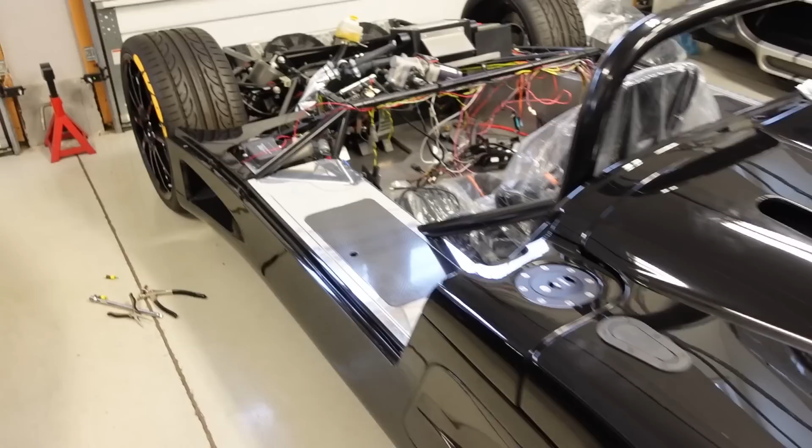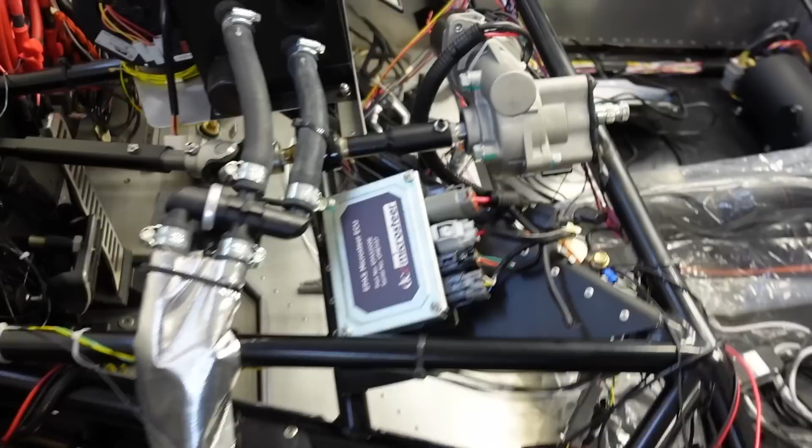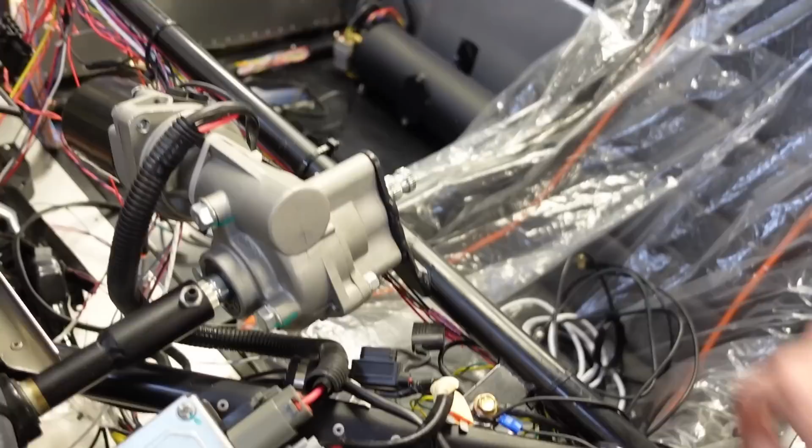First of all, I took off the adapter and everything, so all that's left is a little stub here, which is nice because I could put the front cowl, the dash, on without interfering with this. There was enough space between the end of this shaft and the dash where, through the access panel in the fender well, I could reach in and put a piece of tape with a 1-inch circle on the dash that lined up perfectly there. So pretty easy, straightforward there. Let me show you what that looks like.

Here's the piece of tape with my circle, and again that lines up longitudinally centered with that stub shaft. I'm going to have to make this hole a little bit bigger, maybe 1.25 inches in diameter, but this will at least get me started, and I know it's in the exact right orientation on the dash. So let's get that thing drilled.

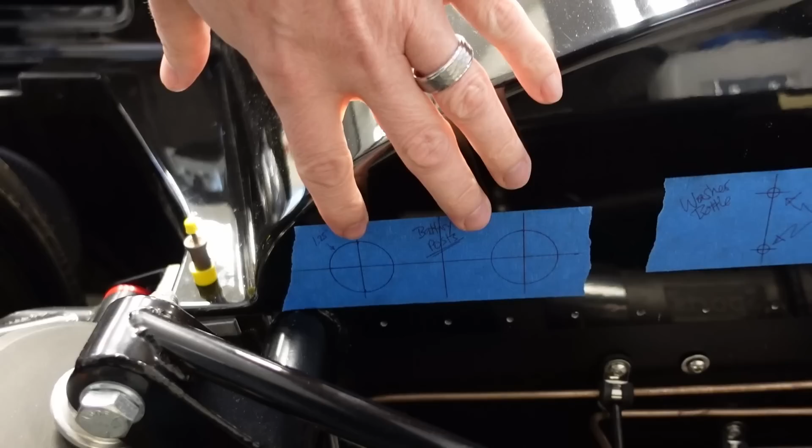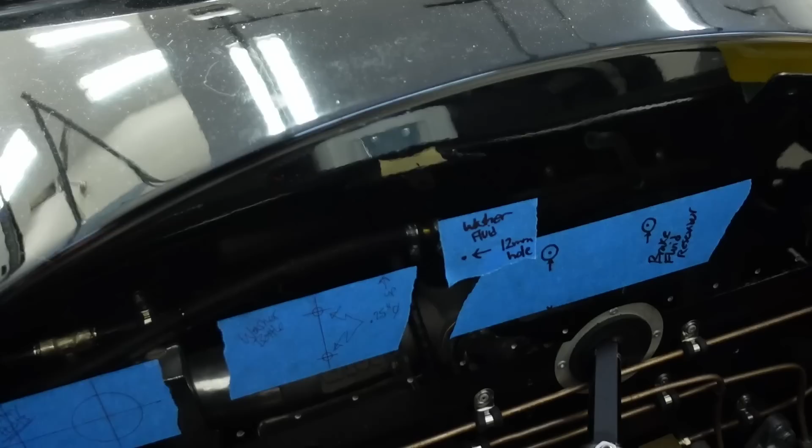I've also got a bunch of holes here all marked out on the front: my battery stud posts, the reservoir for the windshield washer fluid I've got here, as well as the brake fluid reservoir that's going to get mounted up here, and the pass-through hole for the windshield washer fluid pipe. And then I've got the wiper motor holes here all marked out, in addition to the sprayer nozzle there as well. So I think I've got this marked out.

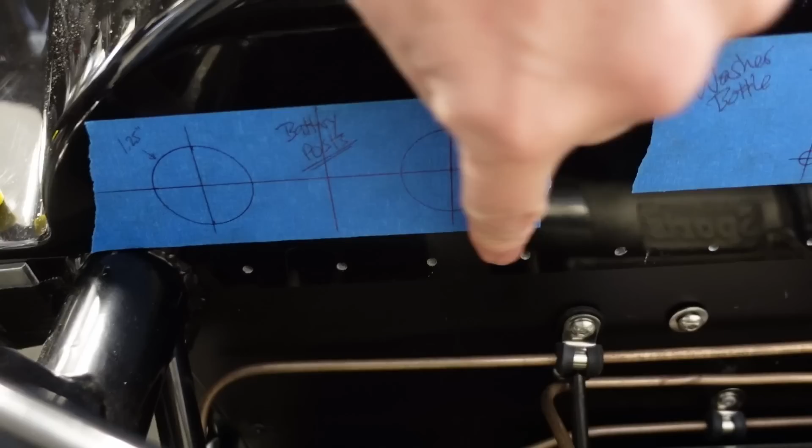I've already drilled the rivet holes you can see here along the base, and I cut out a little half-round moon shape here to go over my grommet. There's one rivet head preventing this from sitting completely flush, so I've got to trim a tiny notch so it sits flush.

So those are done. Of course, I'll have to mark all the holes here and along the top to rivet this down to the body as a final step once that's complete.

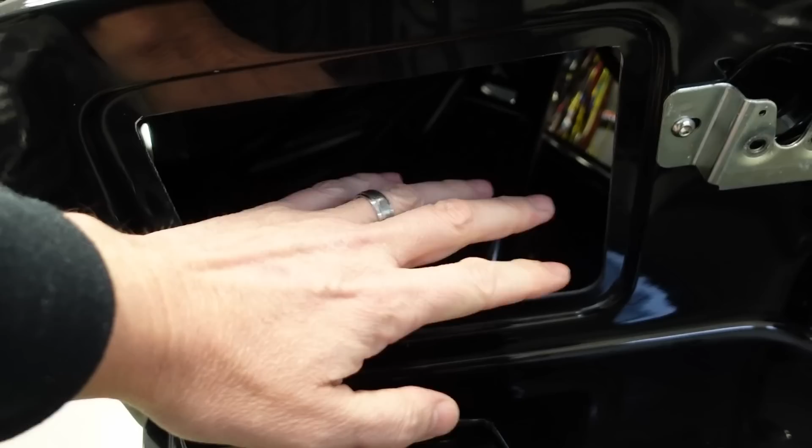I've got the covers here. Normally on these cars this is where the fuse panels go, but given I have the Motec PDM 30, there are no fuse panels, so this just becomes an access panel to get under here in the cowl area.

There's one on each side, and these come with just flat aluminum covers. You rivet some holes, put in some riv nuts to hold them. But what I'm going to do is use some carbon to create some carbon panels.

So I have this sheet of carbon here, about 3 mil thick. Here are the original aluminum cover plates - I'll use them as a template and simply cut out the carbon to make some carbon panels. That'll be a nice trick little update and upgrade for this front cowl.

The other thing I need to start thinking about is the interior - what I'm going to do about it. As we've seen many episodes ago, I carpeted this rear bulkhead, again just to help with sound dampening, but once the seats are in here you're really not going to see much of it at all.

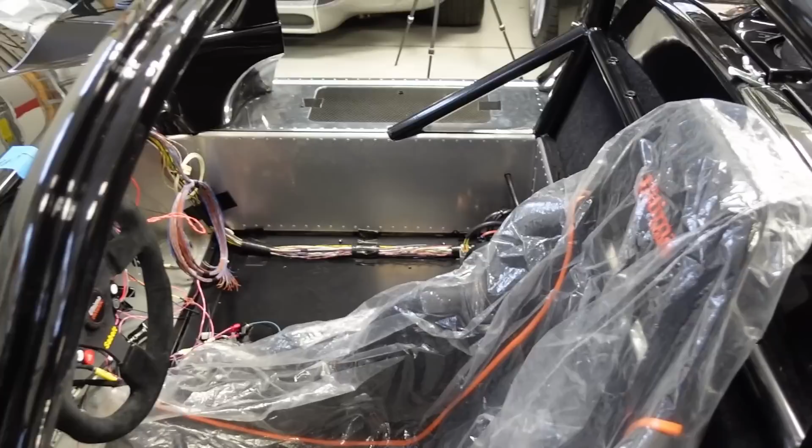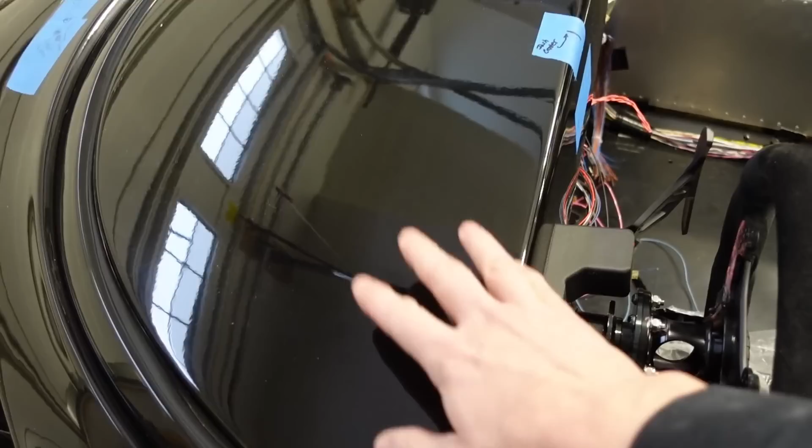But rather than carpet the rest of the interior, certainly on the sides, I'm thinking of using some foam-backed black Alcantara on the panels down the sides. I do have the Alcantara dash covering here with orange thread and orange piping that will look nice, so this entire area - the front of the dash, the top of the dash - will all be Alcantara.

Of course I've got the Alcantara steering wheel too. That's what I'm thinking - let me show you some samples I have. So here are some samples I picked up from a company called Relicate. You can buy a lot of different OEM Alcantaras here, but I've got all different black colors.

A basic one there, then there's a perforated one - it's got little breather holes in it. Then there's this foam-backed version, about 3 mil thick in total, but really soft and plush. And then this is an exterior Alcantara.

This is for outdoor use. This is a convertible - of course I never plan on driving this thing in the rain or getting stuck, but I suppose this exterior stuff might be a nice insurance policy. If it ever does get wet, it will withstand the water.

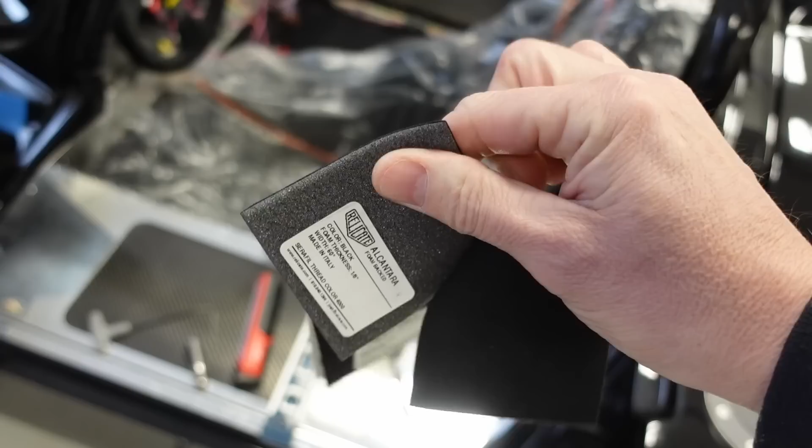I'm currently leaning towards this foam-backed Alcantara given the soft plushness of it, thinking I could cover the entire side pod area with it. And the beautiful thing is, this is thin enough that I could shave just the edges of this aluminum down to give me a bit more tolerance between the cover and the aluminum, then simply fold this over to give a nice edge, a nice seam all the way around, and leave this cover exposed carbon.

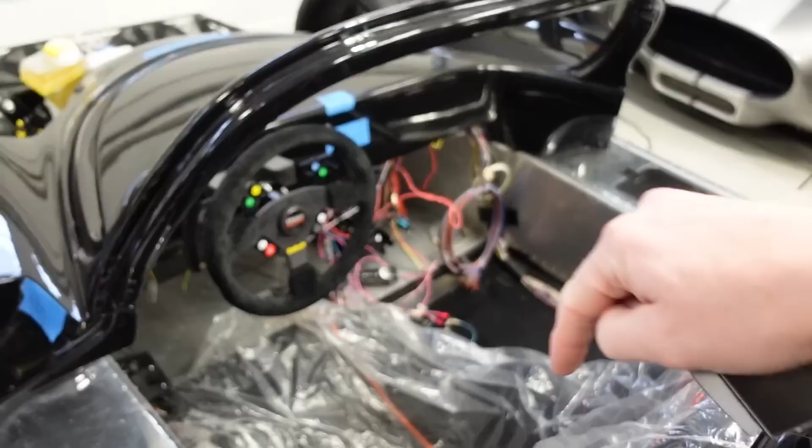I do have a front carpet area - for the main footwell I ordered from the factory a black with orange piping front carpet. The other thought is maybe at some point having an interior guy cover these roll bar tubes in the same Alcantara as well. That would make it look trick.

That's where I'm at. I've certainly got a lot of wiring to clean up still - not a big deal, but getting this front cowl fit, pre-fit, holes drilled, ready to go. That's what I'm currently working on as well.

One other thing I did - if you remember, many episodes ago I installed these quick latch systems here, and started doing it on the front. The post - you can see the hole here - this is where the post goes for the quick latch. On the front cowl I'll cut the quick latch in here and it will mount there. This is the original latch system that goes on the front cowl.

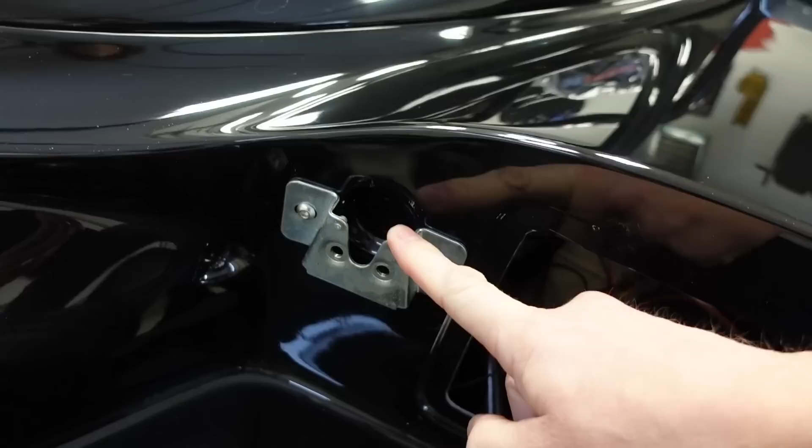The other side's over there. I actually completely disassembled the latching mechanism so that this simply becomes a place to hold the post for the front clam. The latching mechanism will be the quick connect system that I put here.

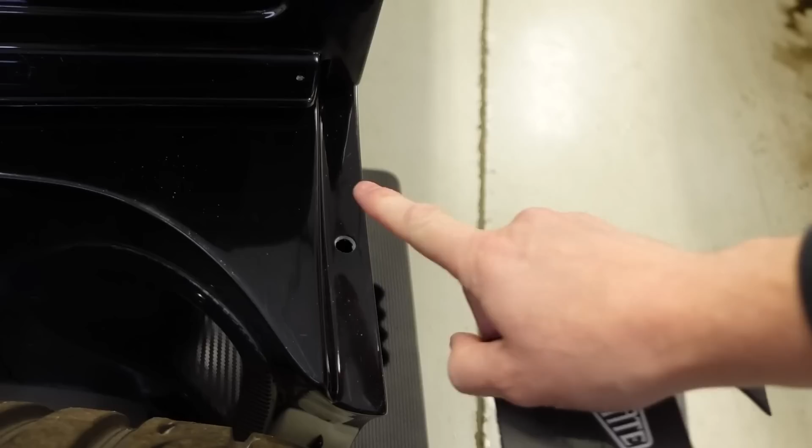But I put these back on without the latching mechanism and put the posts back on the front clam just to give a way to center or locate the clam when it closes, and then give it a resting spot here. Just one other place of support for the clam, given that I deleted this latching mechanism, your latches are on the outside, and then you've got these body posts here that will sit on. This will just be kind of yet a third spot. One mounting location, two, and then three on each side. That should give that front clam some nice support from any wind buffeting or vibration.

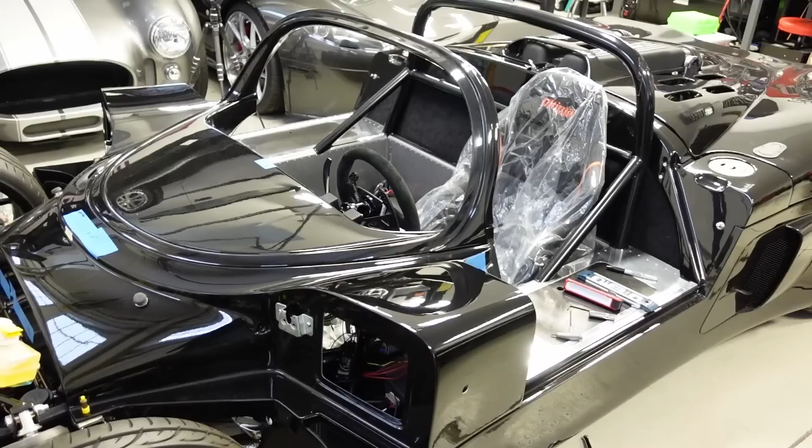So that's what I have done there as well. It's been good getting this thing all prepped, ready to go. Next thing I'm gonna do is pull this back off the car and get all those holes drilled. It's just easier and cleaner to do it separate from the car.

Then we'll work on getting all that wiring cleaned up and get ready to get this cowl back on. This will be the piece I put on really towards the end of the build, given that access to the wiring and harnesses there. It's a little bit more difficult having to crawl underneath the dash to do it when you could otherwise just take this cowl off to do that. So it's coming together pretty well, I'm pretty happy with it. Let's keep this show rolling.

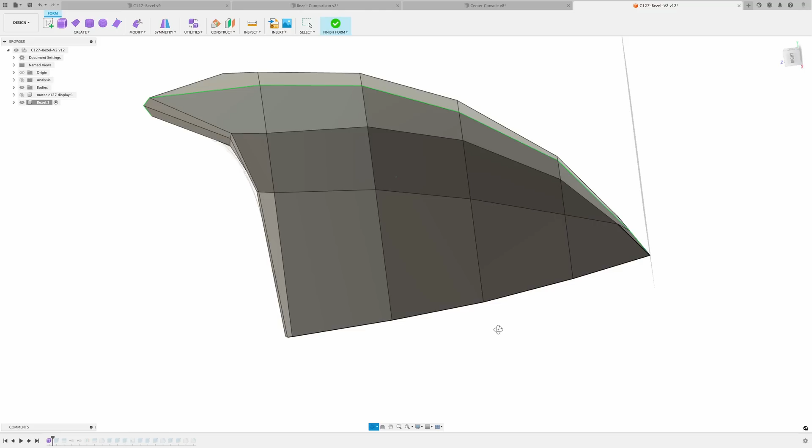All right, next up was to design my gauge bezel for the Motec C127 display I have. So here we are in Fusion 360, my favorite CAD application. This is just a quick run through of the design I made here. This is actually version number 2. Version number 1 was a little bit bigger, too big honestly, and I'll show you that in a minute. But here you can see basically it's a hollowed out bezel.

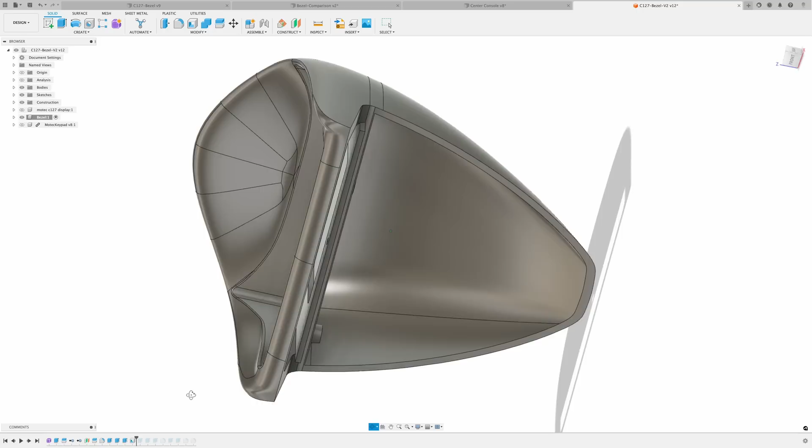I will 3D print this in PETG plastic. It'll mount on top of the dash and is somewhat inset in the dash as well. You can see along the side profile, it'll contour around the front of the dash. And of course, using the C127 model here, that's what I used for the cutout, and to model this with perfect fit.

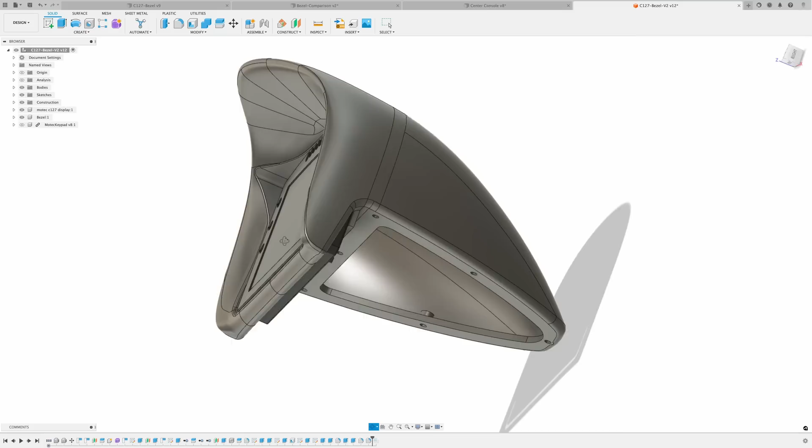Now the other thing I had to do with this is basically cut this into 2 pieces, print it in 2 different pieces. Here's the rear piece that I'll print separate, and then the front piece, which I'll print separate. And then I created some dowels, locating dowels, and I'll epoxy these 2 pieces together as one unit.

And then I also modeled up the dash itself with the correct angle. It's about a 100-degree angle from the flat surface to the front dash surface, just again to test fit and model it out in 3D space before I actually print the real thing. So I think it came out pretty well. Let's get this thing printed.

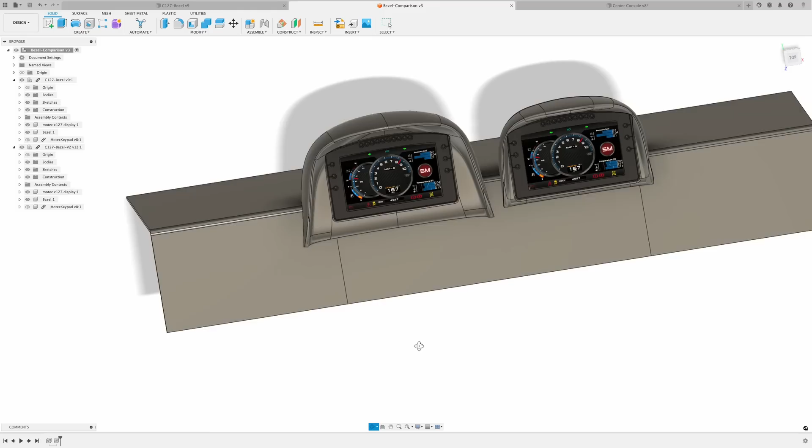Oh yeah, and I wanted to show you version 1 and version 2 of my gauge bezel. On the left hand side you can see version 1. It is much bigger than version 2. I actually went through, 3D printed it, assembled it, got it on the car, and just realized it was far too big for the cockpit. And hence I went to the much smaller version 2, which I'm really pleased with.

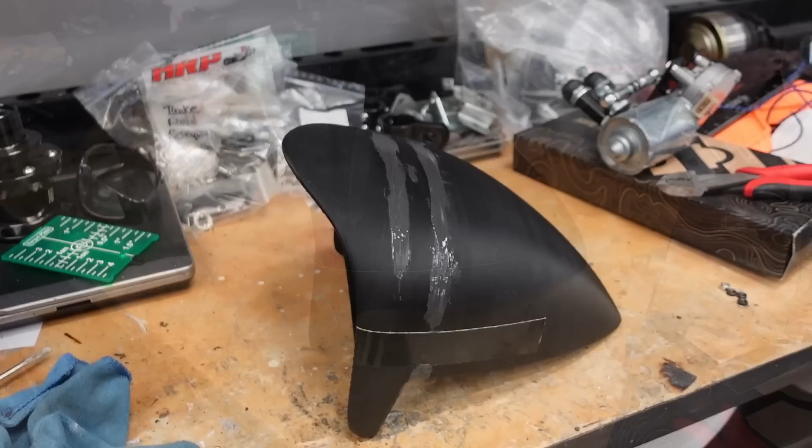Alright, I've got this JB welded and bonded together, the two pieces. I actually filled in another little crack that was just from 3D printing. It shrank a little bit, but the other thing I'm going to do is put a couple of coats of epoxy on this as well, just on the outside, just to give it some additional strength. This is 3D printed in PETG, so it is a little bit harder material, a little bit more temperature tolerant material.

But for even more added strength, I am going to do a couple of coats of epoxy on this just to give it that slick finish, really smooth finish. So when we go to glue on the Alcantara, it'll go on really nice. But this came out good.

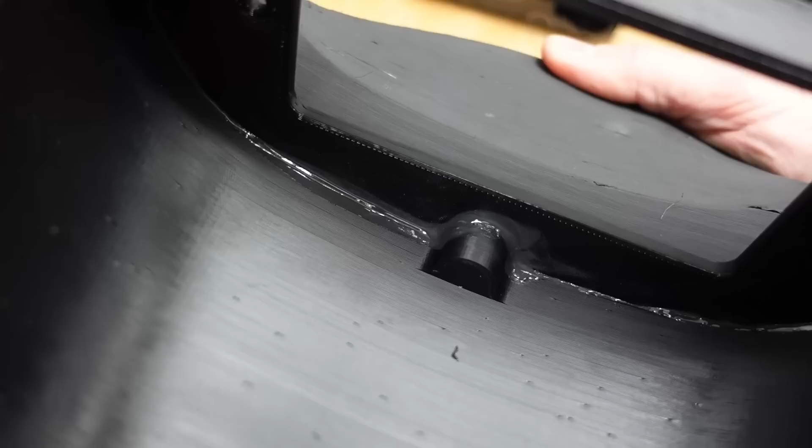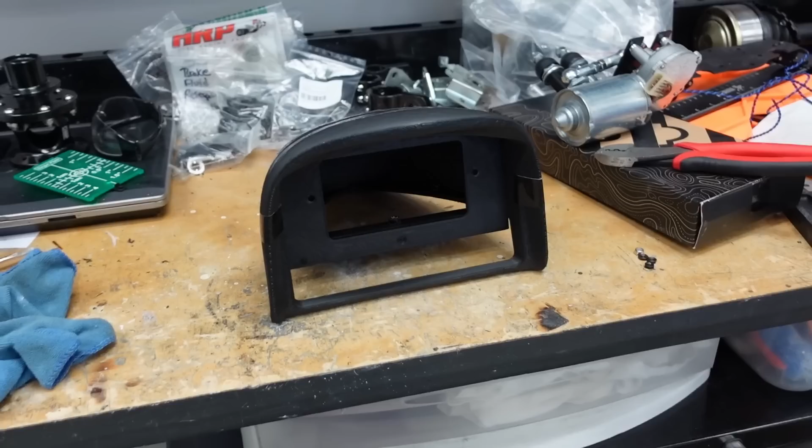I did put a little extra epoxy, JB Weld, in there just so I could create a little bit of a fillet with my finger. And as you saw, I installed some heat-set riv nuts in there as well, and that's how I'll mount it from the underside of the dash and bolt it to the dash. So we are close to getting this wrapped up and finished.

I'll be sure to take some footage of my sister helping me. Hopefully she doesn't mind being on video, and we'll get this thing wrapped nicely in Alcantara, and this will look great on the dash.

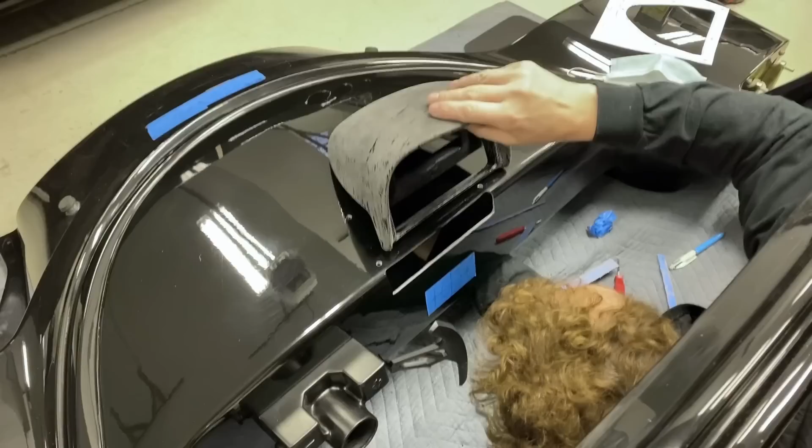Guys, I've been working on this main dash area. I managed to get the bezel on, as you saw, laid down a template, drilled some holes, had to cut some holes for the Motec display to sit in, but let me show you what I got. I think we're at a good spot here, so let's check it out.

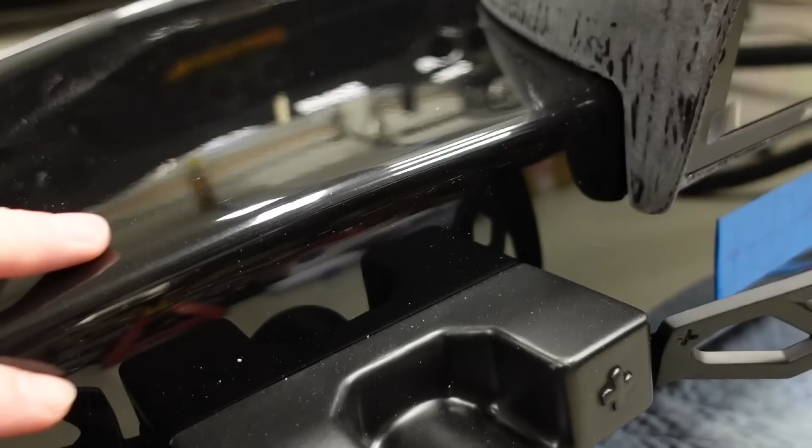All right, so remember, this is gonna be covered in Alcantara. I did a couple of coats of epoxy. It's all sanded smooth, ready for some glue for that Alcantara covering. You can see I've got the display in there. It fits nice, kind of countersunk into the dash a bit. And then when all this dash is covered in Alcantara, I think it'll all blend.

Very nice. And my Motec keypad is gonna go here where you see the masking tape, again center mounted. So that'll look good. The only thing I have left to do is cut the hole underneath this so the wire harness can pass through, and so I can reach my hand in there and unscrew the display if I ever have to take it out after this front bulkhead is completely in place.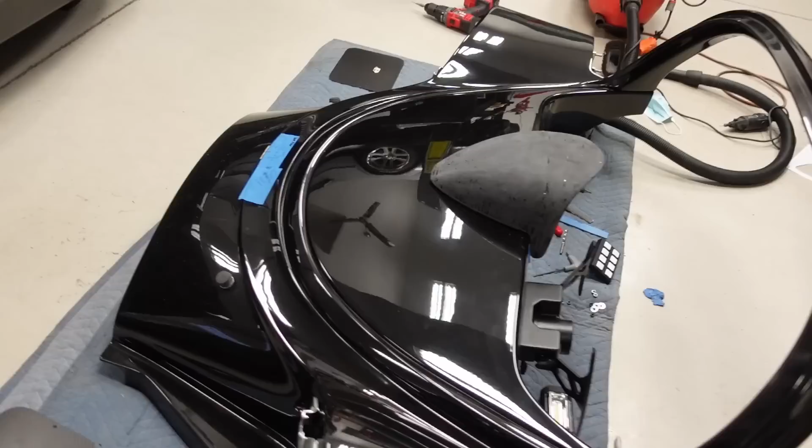I've got some more holes to drill here. I've got to drill the holes for the riv nuts so that my carbon fiber covers will screw on nicely there, same on the other side. And of course, I've got a bunch of holes up front. So just a few more to go, and then we could put this back on the car and do some final test fitting there. Good progress, it's going pretty quick.

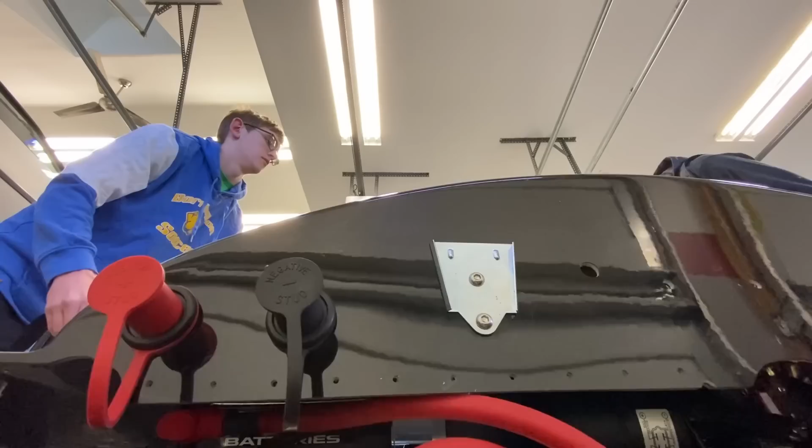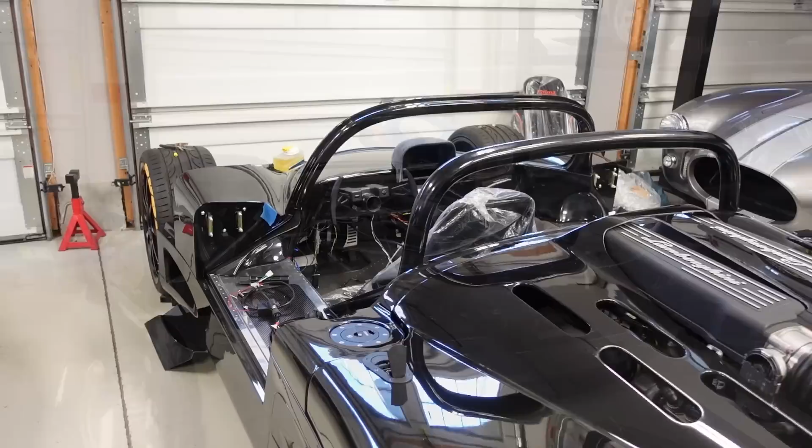Front bulkhead back on the car. Everything slides right into place. Getting good at taking this thing on and off. As you saw, I drilled all the holes for the front mounting locations on the bulkhead.

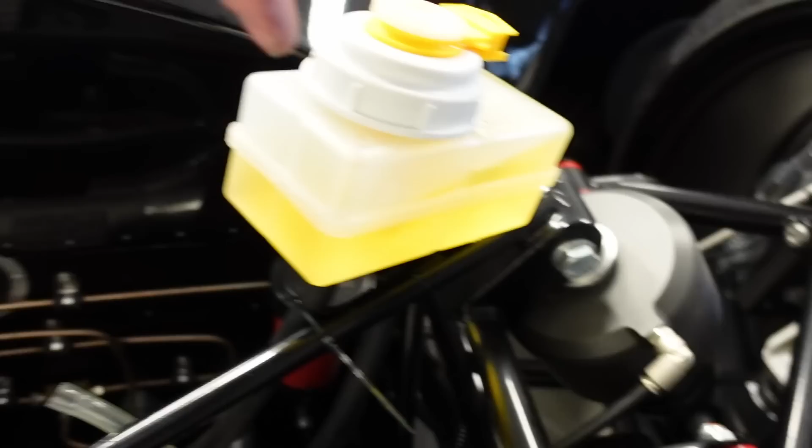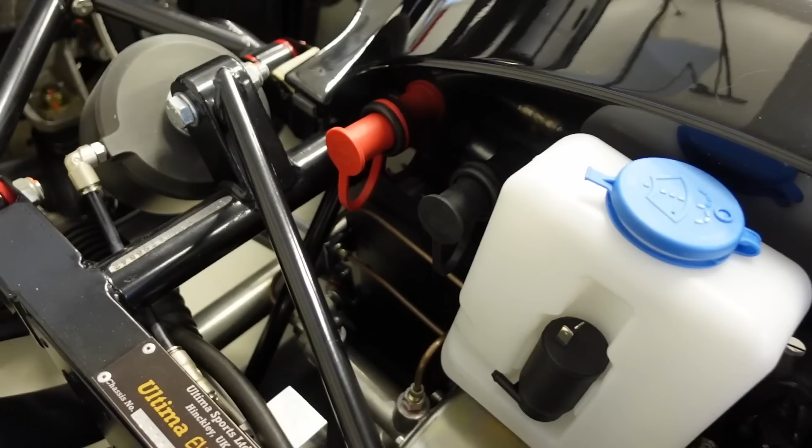The washer fluid reservoir gets bolted here. I've already got the bracket for this guy. And then I've got the battery posts here as well, so that'll be easy to recharge or jumpstart the car if I ever need to. Just open up the front clam and we have access there.

So things are coming together here on this. I've still got to drill the holes for the wiper. I'll do that kind of towards the end once this is ready to go on for the final time.

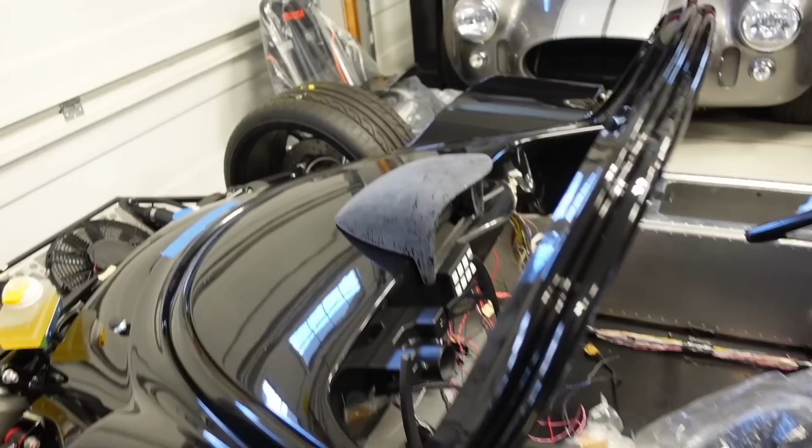Next up, we're going to get this covered. I got to schedule some time to go up to my sister's place and have her help me sew up the Alcantara piece. I've got all my fabric over here. Let me show this to you.

I've got some 1/4 inch foam backing here. This stuff is what I'll put on the dash before covering it, given the Alcantara dash has no backing, so I'll add some of this on there. Here is Alcantara, this will go over that bezel. I've got 3 yards of this, and 3 yards of the foam-backed Alcantara as well. This is what I'll use on the interior, kind of on the luggage bins, tops and sides of the luggage bins as well. So this stuff is ready to go.

I think we're in pretty good shape, making good progress here.